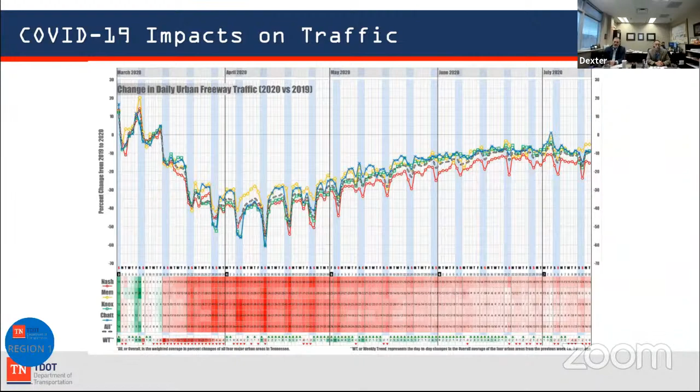This graph gives you an idea of the impact and what it was earlier this year. When you look at the circle around that drop-off, that's the March/April area where we saw everything start shutting down.

If you look across, you have to get back all the way to 2008 to get volumes somewhat similar. From 2012, 14, all the way up to 19, we had a significant climb in the number of millions of miles traveled across the U.S. So right now, we've fallen back several years when you look at the numbers.

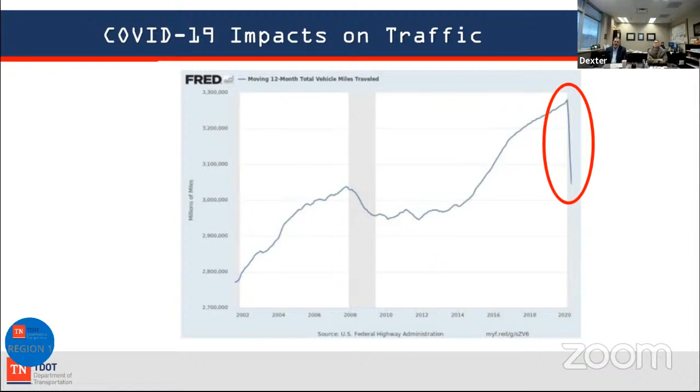What does it mean? Our fuel tax is correlated somewhat with vehicle miles traveled, so that's going to have an impact. This is an older slide, but it showed that at the end of the year, in May and June, we were down about $45 million on the state side in our collections. State revenue is funded in two places, state and federal taxes, the ones that go to Washington and then come back.

But we had been over, when you look through July through February prior to the pandemic, about 40 million. We did some administrative savings to tighten our belt, and at the end of the fiscal year we hit about where we expected to, knowing that this fiscal year we would have to see those impacts.

Looking at it as we go forward, I think when you start looking at what we're probably seeing, you're probably looking at this year about an 8% reduction in the amount of revenue on the state side moving forward.

If you looked at the worst case scenarios early on, we would be looking at about $250 million in difference. We're not going to hit that mark. We should be 100 million or less in reduction of funds on the state side, and we're doing a lot of things to try to do it.

So, an overview of what we do here at the department in the region. It's 24 counties, and East Tennessee is what we cover here in the Knoxville office. We have a lot of different disciplines under this house.

If you look at the project development side, which is Dexter's side of the house, starting out we have our own survey division. We go out and do our own survey for projects as well as oversee consultants. This is a LiDAR scan of a flooding issue we did several years ago. Those are millions of points of data that we're able to go in and use to correct the issue.

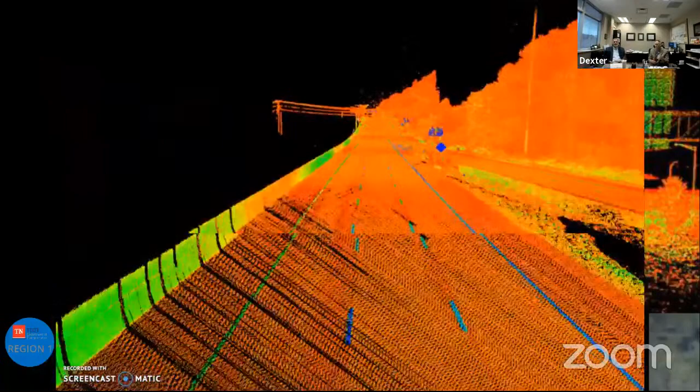At the same time, we have our own drones that are able to go in. You're getting data that's good to less than a quarter of an inch, which allows us to be pretty creative, especially with rock slides and things like that, so we can get a lot of really good data really quickly in-house.

The design section, we have a fully staffed design office that does in-house design as well as oversees projects from consultants that are doing work for us as well.

Give you an idea of something - this is pretty neat. If you go to our website, and we can send you all some links later, if you look at the Alcoa Highway Corridor, you're going to see a 3D model, and you'll eventually be able to see the whole corridor. We can share a few of the videos that haven't been edited with voiceovers yet. But this isn't a video - it's actually a 3D model of the whole project, which is pretty cool, that you can run through. You can stop anywhere.

When we did the public meeting for this particular project, we were the first state in the country to ever do a virtual public meeting. In 3D, people could walk in, they could actually look at their own property with 3D goggles on and see exactly how the project was going to look in their area or how it functioned and so forth.

So this is some of the stuff that you'll see that we do in a lot of our large major projects. It's the direction we're going. We're not there completely yet - we're doing it on some major projects, but not all of them.

We also have an environmental section. Obviously we do our own permits here and apply for them, do a lot of environmental boundary work and things like that. It's a big part and component of developing a project when you're in that early NEPA environmental phase.

Get that early design done, and then we move into right of way. We're a large real estate company in the sense that we buy and purchase a lot of right of way. We sell and lease a lot of right of way as well. There's a lot of work done anytime we're widening a project, obviously we have to go out and purchase right of way for that.

We do a lot of 3D modeling, and as we move further into the 3D world, we can do this virtually. This is a lot of underground utilities on a particular project, with several different types along with our storm drainage. The software lets us deconflict with our partners in the utility world ahead of the contract, refining the plan so we don't get a signal footing into a water line, or a storm sewer crossing into a water or sewer line. This helps mitigate expense on the back end. That gives you a rough idea of some of the things we do in project development.

The other side is operations. Looking at the total department, we have about 850 employees in Region 1. About 110 to 120 of them are in project development, and the rest are in operations, which is a pretty large portion. One thing you see a lot is the construction side of the house, our inspection and oversight of big projects. You'll also see maintenance, traffic, safety, and incident management. I'll talk about those in a bit more detail.

Looking at projects, this is an interesting slide—right now we have around $740 million under contract in East Tennessee. Maintenance is about $40 million on top of that. This slide gives you an idea, not by cost but by number of projects, since a grade, drain, and pave job is a lot more expensive than a maintenance job. But looking at the number of projects let, it shows the distribution with safety and intersections and enhancements—I'll talk about that more in the traffic section—versus bridge replacement repairs, general maintenance contracts on our roadways, and state industrial access, which is a great program. It's that last mile to a project, so to speak—not always exactly a last mile, but that's how we say it. It allows us to help when people have economic development opportunities in both urban and rural sections of the state.

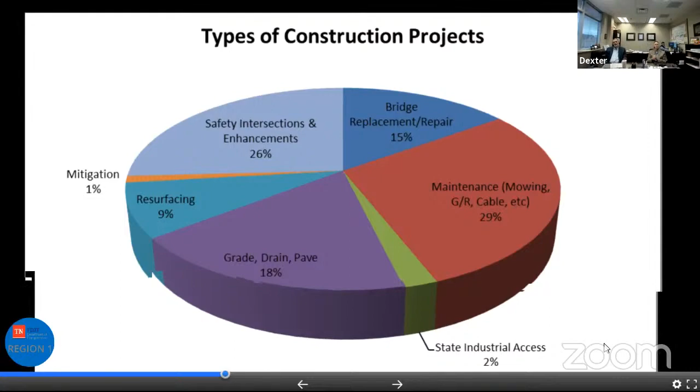Looking at some of the technology we're doing now: pavement marking and testing inventory. We go around and inventory all of our striping, making sure we've got the right reflectivity on new projects, as well as knowing when it needs to be redone. We do that with a machine that's actually part of a vehicle now.

I'm still a paper person. I love paper, I still draw on paper. I'm not good at drawing on the plan grid like Dexter does—I'm not quite there yet, but I do use it a lot. We have the ability to go out, meet with people, and actually do it in tablet form now.

Traffic signing and marking is one of the areas that's really close to home for a lot of us. Looking at communities across the region and throughout Knox County, at the end of the day we're serving the public, and this is a very integral part. We have a sign and marking office and do a lot of stuff in-house, as you can see. On top of that, we look at a lot of low cost safety operation improvements, and it's great. Being on the county commission, you appreciate when you're able to stretch your dollars, and we're the same way—if we can make a huge improvement for less money, we're all about doing that.

Sometimes they're interim improvements, and these guys are real innovative. Looking at one project we have sitting over here to the right, there's an engineering graph you'll see. This is on I-40/75, and you'll recognize it. What's really interesting is there was actually an identified Improve Act project that we're still going to do, but we're moving it further west to get a better opportunity.

That job would have cost probably around $40 million to complete. What we were able to do with our staff here in the traffic office, we analyzed this carefully and went in and did a resurfacing, re-signing. We reassigned the lanes, put a lot of markings down, and changed some things about the traffic flow. We were able to reduce the conflict points and greatly improve the functioning of that area, getting similar numbers to what the $40 million project would have achieved. And we spent $3 million.

It's looking at diverging diamonds and things like that, getting really in the operational weeds there.

The 407 project, a lot of us go to Dollywood up there. We got one coming to Knoxville, another one coming soon at a key area. That particular project we were able to do inside of the right of way, start to finish, from it being on the hood of a car at the Smokies parking lot to getting it to contract, in less than 3 years, with no right of way. The cost ended up being $11 or $12 million. The other options were around $40 million and would have taken 8 years to deliver because of the amount of right of way, and would have functioned at a lower level of service.

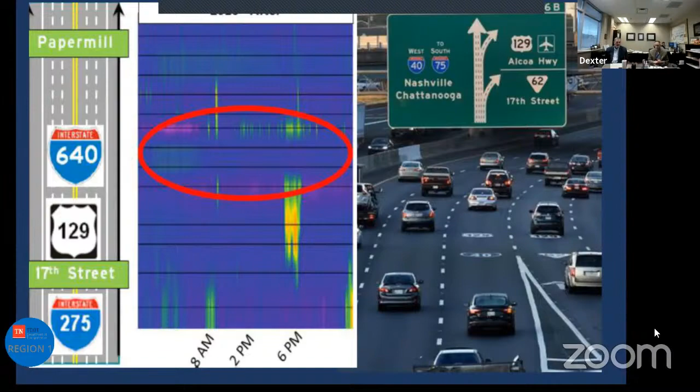Being creative is one of the things these guys do on a ton of safety projects. That's one of the things where we engage the public as well as our partners at the county or wherever we're working all across the state - people know their area better than anybody. I live in Corryton and Gibbs, so I know those roads really well. Just like all of us do in our area, we get feedback and we're able to go out and do some studies. The good thing about these guys, they don't study it and walk away - we actually keep a database and see how well our safety improvements are doing.

When you look at crash rates where we have fatalities and very high crash rates, and you make an adjustment - we did one on Alcoa Highway, and we went from a very high crash rate with fatalities in a 2.5 to 3 year period to zero accidents. When you're able to do that, you save some people's lives, and that's what it's all about.

I also work a lot with developers, providing safe and reasonable access. One of the things is protection of corridors. We spend a lot of money on corridors, sometimes with bypasses.

If we're not careful as an agency, us and our local partners, then a few years later, someone can be asking for another bypass. I think Greeneville's an example where we built a bypass and built another bypass, and now we're back at the same thing - not managing those corridors to make sure we keep them running safely and efficiently while doing smart development at the same time.

So the big thing is making sure that we're able to provide a great transportation system for Tennesseans.

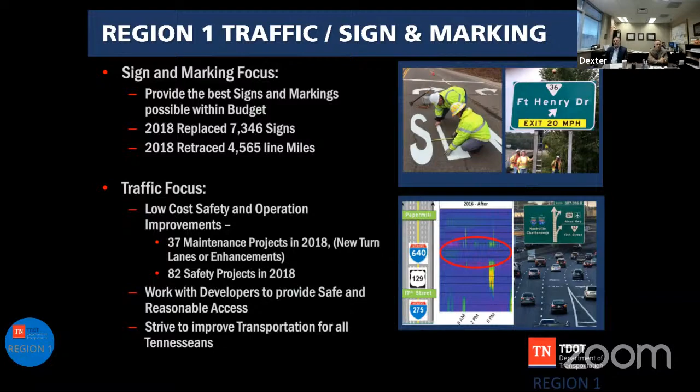Incident management - most of us know those guys, the yellow help trucks, and obviously our incident management center here at the region. You see a video wall in the picture there - we monitor all across East Tennessee. Regional incident management doesn't start or stop just in the urban areas; we actually do incident management all across the region.

We have a very aggressive incident management plan as far as getting roadways open effectively, knowing that for every minute you have a lane closure, the likelihood of a secondary crash increases exponentially. It's very important to us to be able to help law enforcement and emergency personnel - we have a great relationship now to do that.

We have rural incident management, and we're continuing to grow that. If you look at any of our 3-year plans, a lot of times you'll see some of that ITS work going on as we continue to get the bang for our buck out of our infrastructure, to make it run smoother, faster, and give information to drivers and motorists as quickly as possible.

We talk about incident response, and I'm going to show a short video here of a lot of our folks - we respond to incidents on roadways, slides, floods.

Last February, we had 72 or 76 slides in East Tennessee alone. Many of those were massive, 200-foot fills. Roadways are gone. We were talking about routes 70 and 66 up in Hawkins County. There was one fatality out of that, where someone actually drove off that road.

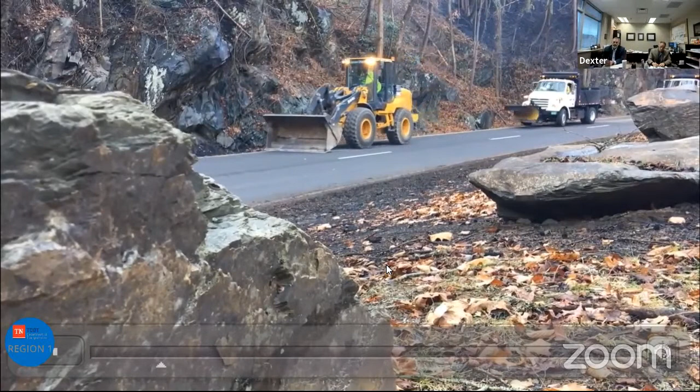They use their skills and experience to clear roadways and to assist other emergency response crews. They risk their own lives to save the lives of others. This is their story. We train for emergencies. We train for clearing roads in emergencies. We train for getting roads back open when they're closed. What you don't train for is the life or death situation, the realization that you're in a real emergency and it's ongoing. This isn't the aftermath, this isn't the cleanup. You're right in the middle of it.

Power lines, light poles are burning. You've got a tandem piece of equipment that you're driving, trying to get through under power lines and trying to get trees out of people's way so they could get out of there. It was scary, but I knew it was something that had to be done because you're dealing with people's lives up there. I was expecting the worst, and when I got there I saw some pretty bad things - buildings, cars, ambulances, police everywhere. It was chaotic.

There's fire all around us. It's hot, it's smoky. Everybody's panicking, freaking out. I'm standing there and I can't see 100 feet in front of me, probably because of the smoke. That was as scared as I've ever been, I guess, on the job at TDOT.

So the firefighters are trying to cut the tree out of the road. They get 2 or 3 chainsaws stuck in the tree because it's flexing so much from the way the wind's blowing. My contractor pulled up and said there was a tree down behind us. So at that point we were blocked in - tree down in front, tree down behind. I'm trying to start my chainsaw, and I hear a horn blow, or I saw flashing lights, and I turn around and there's the TDOT dump truck - that was Bradley in his dump truck.

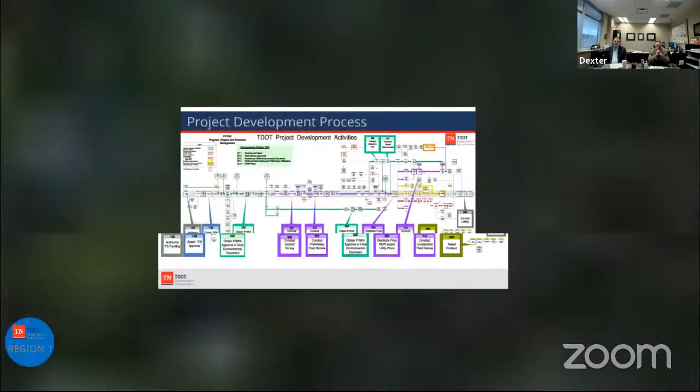When you look at that, that didn't happen by chance. That's something we prepared for years. We actually have what we call a strike force. We put it together years ago.

It was after Katrina when we wanted to go help Louisiana, and we couldn't. We wanted to go, but our equipment wasn't good enough. We didn't have the ability. You never want to go into an emergency situation and have to depend on anybody else. You have to be self-sufficient, or you're just a drain on everything that's there.

So we started developing equipment and training, and each year we trained for different incidents. Matter of fact, the year the Gatlinburg fires happened, our training scenario was a fire. We didn't know we'd have a real fire later, but that's what it was. In that instance, we were fueling all the agencies' fire trucks. There was no power, and we were the ones doing mobile fueling.

So we're able to go into areas and be completely self-sustaining. That came to fruition this year. Lake Charles, Louisiana, earlier this year, a hurricane came through and ripped through the city. It was in such bad shape that Louisiana called for aid, and we were able to answer.

We sent crews down there and they worked for over a week, and it was amazing what we were able to accomplish. The thing was, we fed ourselves, we fueled ourselves, we went in, and we were able to clear a ton of roadways and debris to get access for a lot of communities that were locked down and couldn't get in or out.

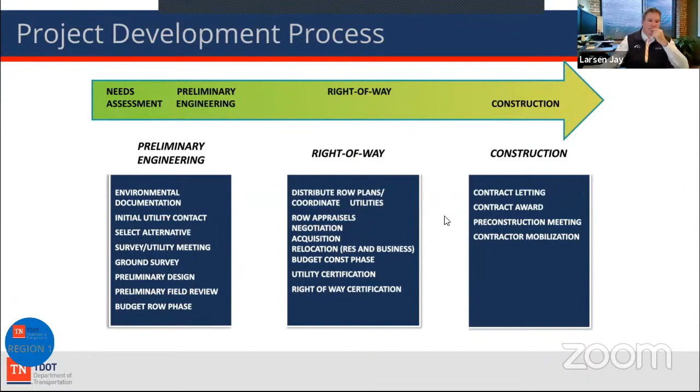Did that answer your question? Yeah, all set. Okay, good deal. So go ahead and move forward.

Now we'll get into investments that have been made. The first map we'll bring up talks about current construction projects. All of them are circled in red—we use colors to identify things. This is our red map, current construction projects.

We've got a slew of projects there, ranging from Chapman Highway with Evans to Burnett—we're moving along with that project pretty quickly. We'll get into some of the Alcoa Highway stuff later when we get into project development; I'll go through that whole corridor, but we got three of those listed there. Then you come around to I-140, a grade and drain job with Pellissippi Parkway at the westbound ramp to Dutchtown Road, an ongoing project with a completion date of early 2021.

And the next one around the map is State Route 162, also on Pellissippi Parkway, Hardin Valley Road interchange. That project's moving along at a good pace and anticipated in summer of 2021 completion.

State Route 62, that's a grade and drain project that Jones Brothers has. I think it's pretty much completed at this point. We're doing a little bit of an intersection modification, so we're still hanging on to that job along Western Avenue.

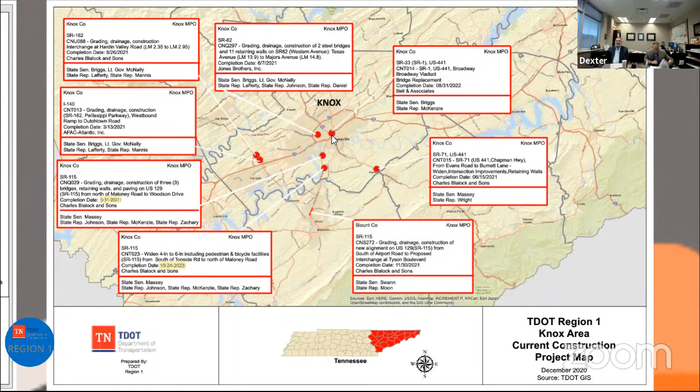So we'll get around to talking about the construction projects on Alcoa Highway a little bit further. Steve, you want to take the resurfacing information?

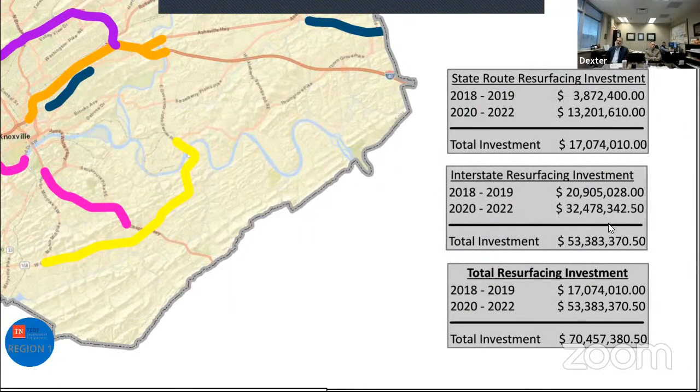This gives you a map, and this is some of the resurfacing projects around the Knox County area that you'll see here. If you look over to the right, you kind of get an idea of what we spend in a period of time. What we do under resurfacing, and we'll get into it a little bit later, we do a 3-year plan. If you look at the total investments, you get an idea of what we spend. Each year, state routes and resurfacing around $17 million over that 3-year period. The next section down, you're looking at around $53 million on interstate resurfacing. Total of about $70 million over a 3-year period as part of the infrastructure maintenance, basically, of the roadway through resurfacing in the Knox County area.

I've got it color coded here. Go back just a second, just so y'all will get this presentation. You can see the legend that kind of tells you when something was paved or when something is scheduled to be paved. As you can see there, we do have a portion of I-640 that's set to go this spring. We're having to do some railroad coordination that's going to push that eastern side off. We'll do some additional maintenance projects in the interim on that one.

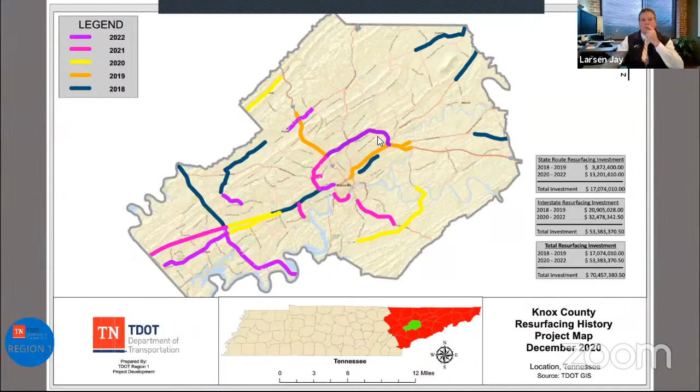Can you talk about the issue with the railroads? On 640, basically what happened was, and I think I'm right, Dexter, we built those a long time ago, and we probably have agreements somewhere, but when Federal Highway came in and audited, they said, we can't find your agreement. Essentially, is that right? Yeah, it's agreement and rights to be there.

Historically, we used to get agreements with the railroad to allow us to build a bridge inside their right of way, that kind of thing. And that's the case with 640. We've built a lot of bridges on railroad right of way. FHWA has come back over time and said, okay, if you're going to be on somebody else's property, you have to have an easement to be there. So as part of any project, we have to certify the right of way that we own it and have the right to be there. Obviously, we use federal dollars on interstate resurfacing, and to certify the right of way on this corridor, we have to prove and show where we own either right of way or an easement that allows us to be there, a permissive right to be there on that property.

So we have to deal with this on every route that we have. It's something that's come up in the past 3 years. And as I'm sure most of you know, dealing with the railroad is a very time-consuming prospect. It's not something where you just show up and say, hey, we got this issue, we'd like to get it taken care of. It's a very iterative process to get ownership of an easement from them. So we are working through that process with them, and it delays projects quite frequently. Yeah, it's something that's having an impact on us statewide. Each railroad's different as well internally on how they work through the easement or access process. So we're having to work through each of them differently as their internal regulations or requirements are there. But it's a priority for us.

When you look at the resurfacing program, sometimes we think of it as just paving, but there's a whole lot more that goes into it. It's asset management, and we do the same thing with our bridges as far as documenting, looking at total number of lane miles and what we're dealing with.

This gives you an idea of what we have in each of our regions across the state. There are four of them. Region 1 is furthest east, that's where we're at, and Chattanooga and north is Region 2. The Nashville area is Region 3, and then going to the western end of the state, Memphis, Jackson, that quadrant is Region 4. That gives you an idea of the total number of assets we have to take care of. This doesn't include bridges, which we also fund and do as part of the resurfacing project.

About what we do every year, we get about $235 million that's programmed for us to use: 66 million on interstates, 169 million on state routes.

As far as dividing out the money across the state, it generally works on the assets themselves. It's broken down percentage-wise, budget-wise by how much we have in each region. Then we do that on a smaller plane when you look inside our sub-districts within the region. Each of them has their own program to prioritize what they need to do, whether it's Johnson City, Morristown, Roane County, or Knox County.

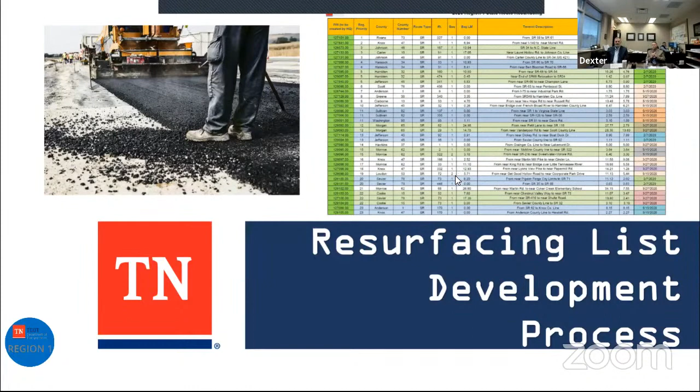That's a list, and we develop a 3-year plan, much like our 3-year multimodal plan you'll see we're actively working on right now. You'll see it's a legislative event. The resurfacing program, we do a 3-year plan as well.

We go in and do extensive work with our district management, the people in those areas. I have a resurfacing coordinator, and he has staff that works in state aid as well to assist him, looking at all of the needs and where our lane miles are as far as condition, trying to maximize our money as we move forward. It's not a situation where we do worst first. I'll talk about that in a minute, but we do a review of the pavement management data.

All these roads are ridden, and we get data from IRIs and stuff like that to tell us the condition of the pavement: cracking, rutting. We do skid testing, all that stuff. We have historical data as well, and a database of what we did, when we did it, what was done to it. Then we look at budget constraints for district personnel, and they work within their budget to develop the best resurfacing plan they can.

We're trying to get a certain number of lane miles per year, looking at the total assets we have and the money, trying to spread that and get as many lane miles as we can so that when we look at the cycle time, we're hitting our marks.

Different things we use, and this gives you an idea how long things last. The OGFC, open graded friction course, you've seen some on our interstates and other major routes. It kind of wicks the water, you'll notice you can see the lines really well, and there's no overspray from the trucks. We'll get 9 to 11 years of life out of that.

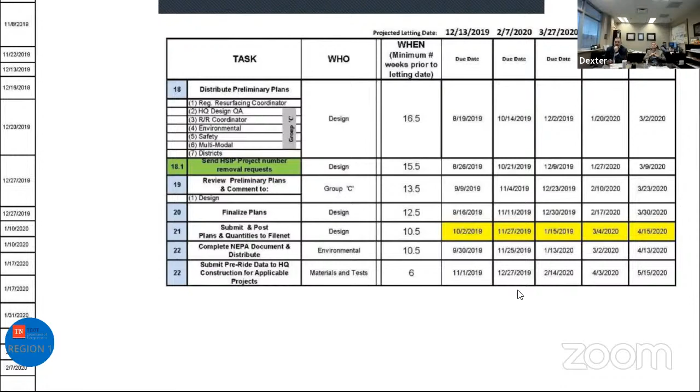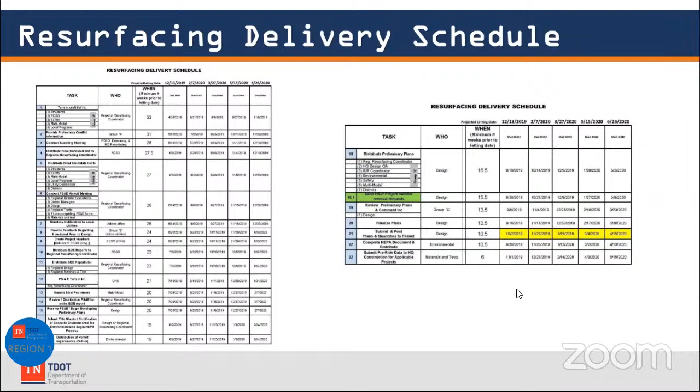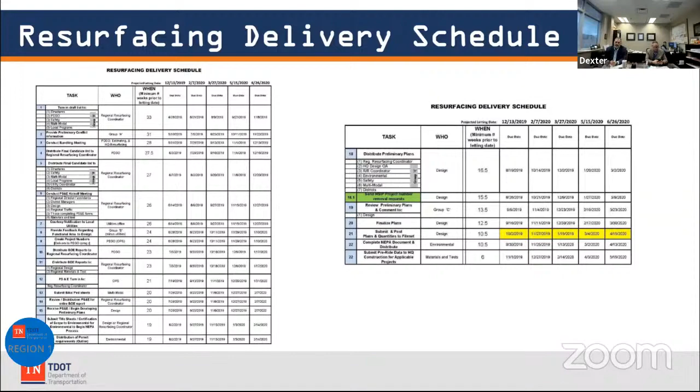From Commissioner Daly, what is the cost per mile to pave federal or state roads? You have that? I don't have that. No, I can get that in two seconds, but go to the next question. I'll look it up, I'll get it right now. That's all I have right now. I'm texting right now my pavement manager to get what that cost is. We'll go on and I'll follow up with that.

Okay, so now we'll move into projects that are currently under development in the Knoxville area and Knox County area. This map here shows most of the projects that we have under development. We'll go through these one at a time, just give you an update on where we are. But what I want you to notice is the blue boxes are projects that are in Knox County, and the other color boxes are projects of regional significance that are in your neighboring counties and probably service a lot of folks that live in Knox County.

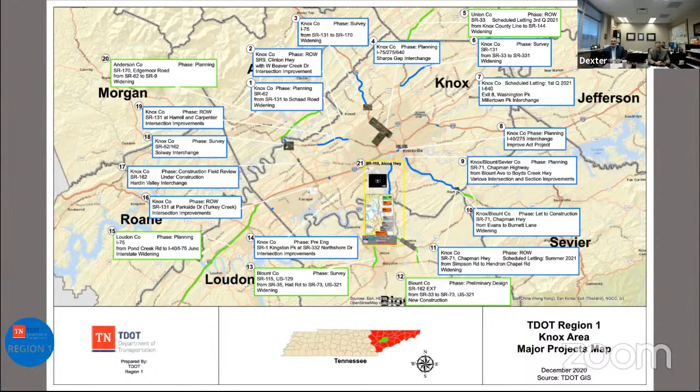So we'll start there at the top with project number one, which is Knox County State Route 62 from State Route 131 to Schaad Road. This is a widening project, I guess, on Western Avenue or Oak Ridge Highway, headed out towards Anderson County. This project is still very early in the process, and we are in the planning process. We have funded this very early in what we call location services part of it, the environmental part, and we're working through putting together a conceptual plan to address the need. We have not moved into full funding for real engineering work with the full design and survey. This is more a preliminary planning type report.

Go ahead. Our answer is about $200,000 per lane mile for the resurfacing.

Project number 2 is State Route 9, Clinton Highway, at West Beaver Creek Drive intersection. This is a project we're partnering with the county on. Jim Snowden's bunch is working on acquiring the right of way, and the county is participating in the funding. We're realigning West Beaver Creek Drive as it attaches to Clinton Highway and adding offset turn lanes to help mitigate a safety issue and improve sight distance.

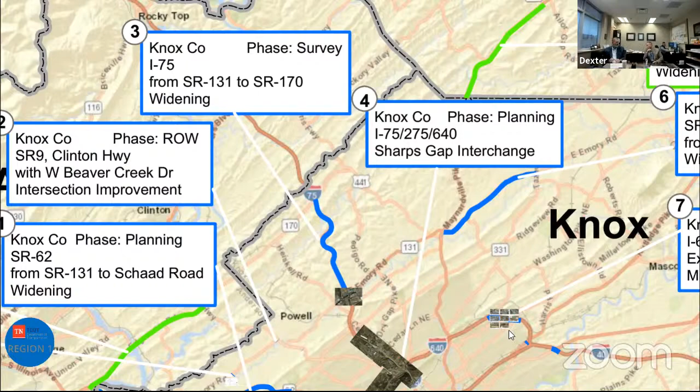Right now, on the I-75 portion that you look at, that's in blue. If you look below there, there's a little insert—that's one that Knox County and the TPO are both participating with us on. We broke this portion out. The Emory Road interchange has lots of cars and a lot of challenges.

Several years ago, we looked at a ramp queue project through Federal Highway, but the level of service didn't really improve—it just parked a lot of cars on the ramp and didn't address the efficiency of the interchange. What we're able to do here, and what we're working on right now to move into engineering and then right-of-way, is a diverging diamond, much like what you have at Bessemer Street. We have one at 407 that you've all driven through, and one right now at Boones Creek up in Upper East Tennessee on I-26.

This is what we're looking at, but the creativity to come through—this is a very creative and innovative thing that our traffic folks and planning folks came up with, along with the partnership we have with the county. The TPO has been able to push this project forward. It's a big need. We'll still be widening I-75, but that job's going to take a long time. We felt like breaking this piece out allows it to move forward and hit a spot that has had incredible growth, and this can handle that growth for years to come.

So, like Steve said, we've broken out the diverging diamond from the bigger project there, which is widening I-75 from State Route 131, or Emory Road, up to State Route 170—I guess that's Raccoon Valley. That project is getting started as well. We're early in the design phases. We do have a planning report already in hand, so we know what we're going to do, but we're heavy in survey right now, moving quickly into the design phase. We have a consultant designer on board to do that work.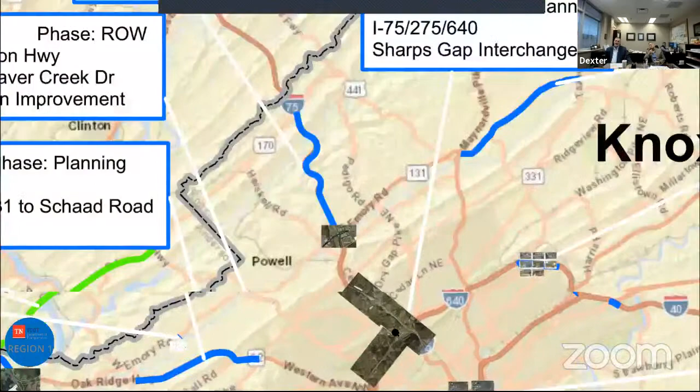The fourth project there is a big project for the region—this is regionally significant, not just a Knox County project. It's the interchange at I-75, 275, and 640. We affectionately call it the Sharps Gap interchange. Andy will probably scroll in there so we can look at the concept, but we're really early in this project as well—we're just now finishing up the preliminary planning report. There's a lot here; we could probably do a full presentation on this project alone, but we'll just scroll through quickly.

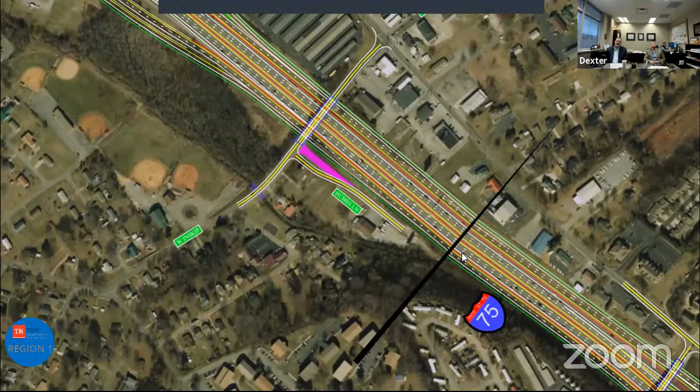The idea here is to try to separate traffic that's going on 75 or making the move onto 640 prior to the Merchants Drive interchange, so we can eliminate some of those conflict points between 640 and Merchants Drive. That traffic will be separated out, so folks will already have made their decision prior to going through the 640, 75, 275 interchange, and you'll be lined up to make this movement a lot better and smoother without having to weave traffic back and forth. Like I say, there's a lot to talk about here.

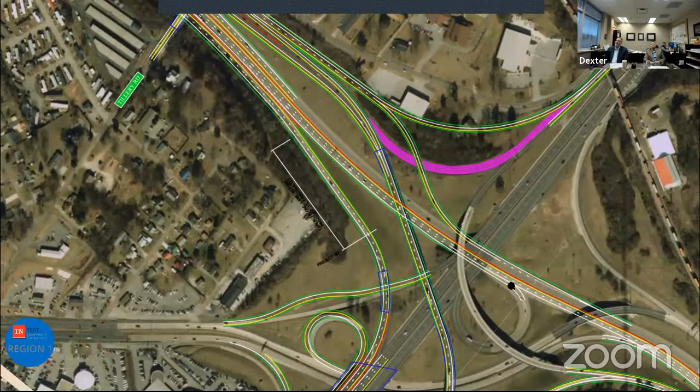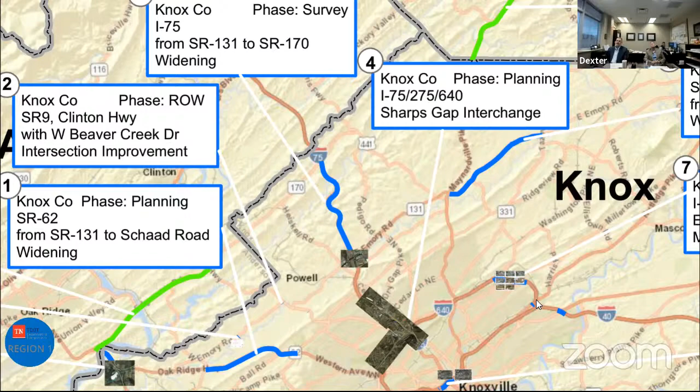That's a lot more than this meeting will handle. I just want everybody to see that we have a plan moving forward that's going to address a lot of the congestion issues here in the peak hours. Just to let you know, it's really early, but we are working on this one at a pretty good pace. The next quadrant of projects, our first green project of this conversation, is number 5.

It's the completion of a corridor, an important corridor coming into Knox County. A lot of folks from north of us travel to Knox County to work. This is a corridor completer all the way from Tazewell into Knoxville, where we've had three phases. We had one in the northern part of Knox County, this is the missing link, and we've done the one up in Maynardville already. This project is in this year's federal fiscal year. We anticipate going to construction in the third quarter, probably late summer. We are widening an existing 2-lane to a 5-lane, straightening out some curves, which will greatly improve capacity and finish an important corridor for growth in the northern part of the county and on up into Union County for connectivity.

The sixth project is Knox County State Route 131. This project is early - I guess this is the eastern edge of Emory Road, heading out towards Corryton. It starts at State Route 33 and ends at State Route 331. This is also a widening project, going from an existing 2-lane to a 5-lane, and we are really early in this one as well. We're in surveying. We have a design consultant on board, ready to start design work once the survey is complete.

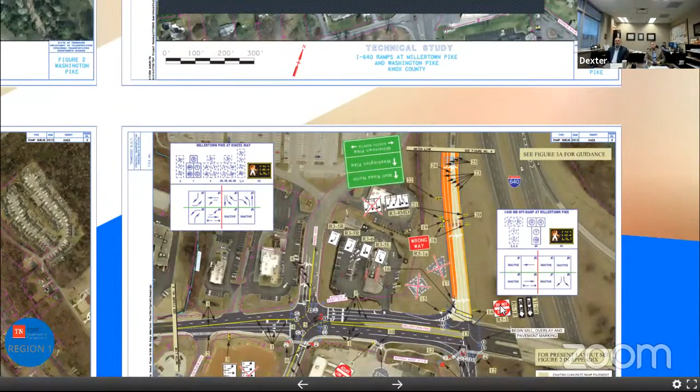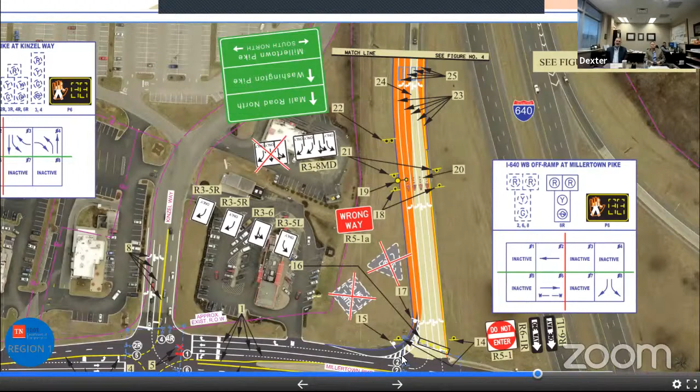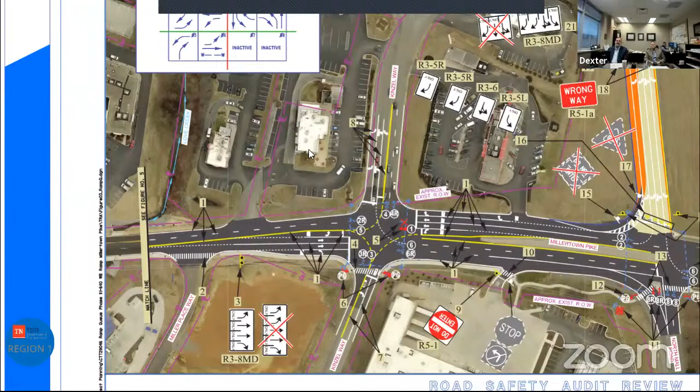This is the concept coming up from 640 westbound, approaching the mall. We're adding an additional right turn lane on this section and widening the ramp all the way back toward the interstate, so we'll have a lot more storage capacity here, improving some radiuses and adding an additional through lane through the next intersection up there - I think that's McDonald's at that intersection - and then it carries on down through to the next intersection towards Food City and all those good things.

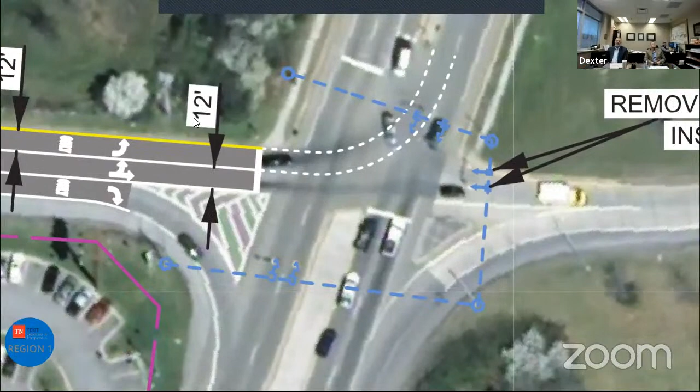On the other end, at the 640 westbound exit - yeah, right there, Andy. Here we are adding an additional left turn lane. Is that right? This is on there, that's not the right. Yeah, that's the wrong approach. Hang on.

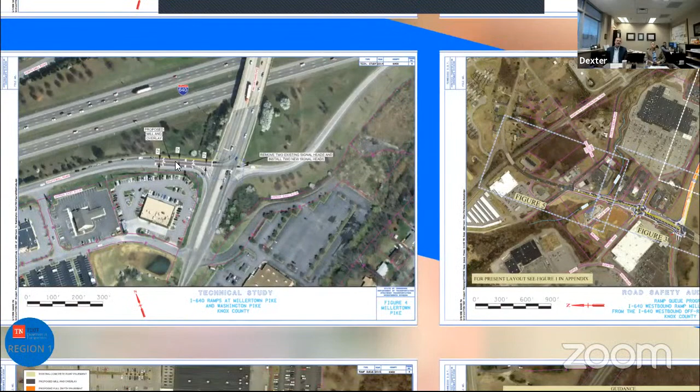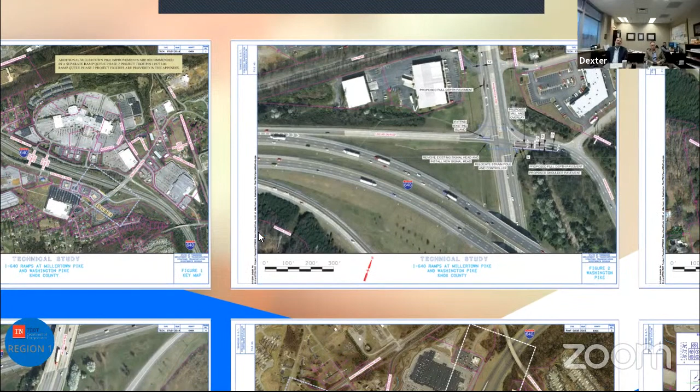We had a follow-up question to Commissioner Daly's question about paving. In reference to $200,000 per lane mile - does that mean if a road is 4 lanes wide, it's 4 times 200,000? Yes, and let me give you a breakdown on that.

So that's for something like an interstate, where I'm putting in a binder course or a structural 2-inch layer plus 1.25 inches. If you just do a regular 1.25 inches of D, you're looking at about $90,000 a lane mile. If you have to mill it, and a lot of times when you have curb and gutter that adds another $10,000, getting you to about $100,000. We do thin lifts in 2 different sizes - one is 85 pounds per square yard. For instance, a regular D of 1.25 inches is 132.5 pounds per square yard. The thin lift is less than that, about a 3/4 inch roughly lift.

That's about $70,000 per lane mile. If our road is in pretty good shape, we don't want to always do worst first - part of increasing pavement life is trying to get the right fix at the right time. So I can do a thin lift early on and extend the life of that road 14 or 15 years, versus letting it deteriorate for 2 more years and then spending $100,000 a lane mile rather than $70,000 a lane mile. So that gives you an idea, but it is per lane - so if you have a 4-lane highway and you're doing an overlay of D only, that's $100,000 per mile per lane, so it'd be $400,000 for 1 mile of 4-lane roadway.

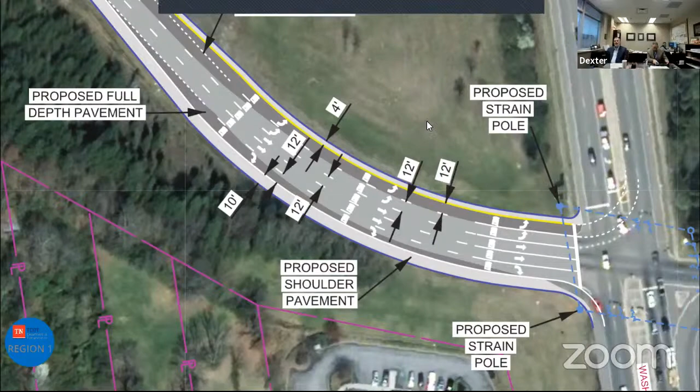You can see there in the light gray color, that's the existing pavement width. So we're adding pavement width, not really to add an additional left turn lane, I think we're adding an additional through lane maybe. Or it won't be a shared left-through, it'll be a dedicated left turn lane, additional dedicated left turn lane, and a right turn lane as well. So we're just improving that intersection there for capacity and safety as well.

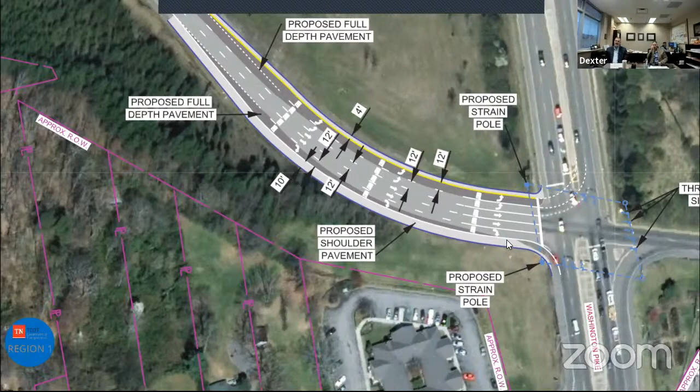And like I say, that project is set to let in our February letting, so we should have a contractor out there pretty early next year.

Project number 8 is the I-40, I-275 interchange. It's an IMPROVE Act project, one Steve talked about a little earlier, where we've done a lot of improvements with the resurfacing project. So we're expanding the limits of this project, and we're early in the planning phase to figure out what that's going to be. With those improvements we made with the resurfacing project, it moved some of the congestion and backups more toward the 640 interchange with 40 on the west end of town as you approach the paper mill exit. So we're expanding the limits of what we want to study there and what improvements we want to make. We don't have an answer yet - we've not come up with a plan to address the need, but that's what we're working towards.

Next phase of projects here, project number 9, is what we talk about as the big Chapman Highway project. This is State Route 71 from Blount Avenue all the way to Boyd's Creek Highway, about a 10-mile section of roadway. We're early in the planning phases here as well, trying to figure out how we want to address the needs there. There are a lot. This project is really looked at as a safety project, so our first priority would probably be to add that center left turn lane all the way through this corridor, and then we'll go from there to see what other needs we can address.

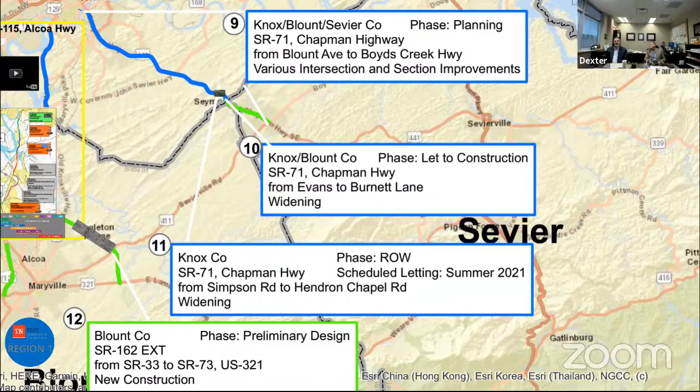As you can imagine, that is a bit of a hiccup right now with what's going on in the world today. A public design meeting is not something everybody wants to rush out to, but it's a required part of the process. So we're trying to figure out how to hold a public design meeting in the COVID era we're living in right now. That's kind of put a pause button on this project, in the sense that the next thing we have to do is check that mark that we presented our findings to the public. As soon as we figure out how to have that meeting safely, that will get this project moving again.

Project number 13 - this is probably a standalone project for the Alcoa Highway corridor. We'll get up to project number 21 on the map later, which we affectionately call the Alcoa Highway corridor, which is really from Knoxville there, Cherokee Trail, all the way down to the airport. This project, number 13, starts at the airport and continues south.

Some people refer to it as the Maryville bypass, or the highway bypass project. It's from Hall Road to State Route 73, or US 321. That's a widening project as well, going from a 4-lane highway to a 6-lane highway in that section. We're finishing up survey, in preliminary design, and will be moving to right of way hopefully sometime this year. Project 14 is State Route 1, Kingston Pike at North Shore Drive.

This project also is in preliminary engineering phases. We're using SUE techniques, subsurface utility engineering and investigation, which is kind of new to us. This intersection in the middle of a heavily used part of town has all the utilities you can imagine. So we're doing a lot of surveying work, using non-destructive testing to find where all these utilities are, so we can have a good, successful construction project. The next phase is right of way on this job, and I guess we'd probably be looking at two years worth of right of way and utility work before moving to construction.

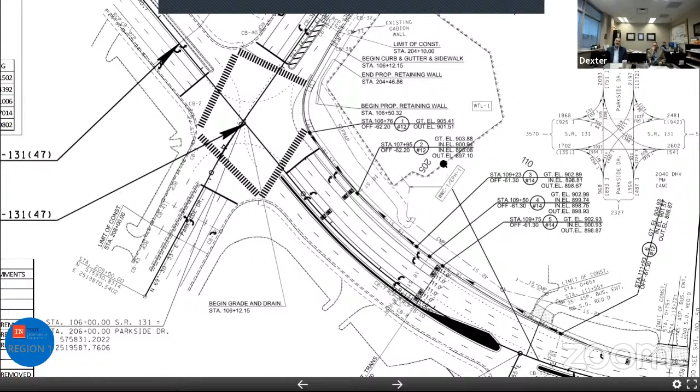Our next project is number 17, Knox County, State Route 162, Hardin Valley Interchange. As we talked about earlier, it showed up in red — it's under construction currently. Number 18 is the State Route 162 interchange, also affectionately called the Solway interchange.

What we're looking to develop here, instead of a 3-legged interchange for these two state routes, is to make it more of a traditional interchange — I hate to call it common because it's not a common design — where you have exit ramps with the opportunity to move in different directions at the bottom of the ramps coming off of 62. What we're developing here, similar to a few others around town, is a SPUI, a single point urban interchange. So instead of having two different intersections on each side of the main thoroughfare, you have one intersection in the middle under a bridge, with one set of red lights that has a couple phases, cutting down on conflict points and moving traffic a lot more efficiently.

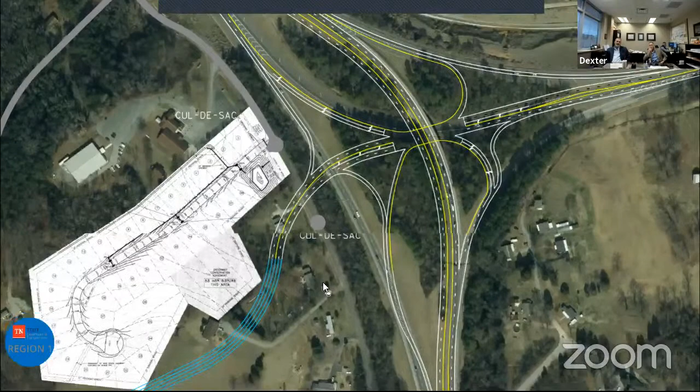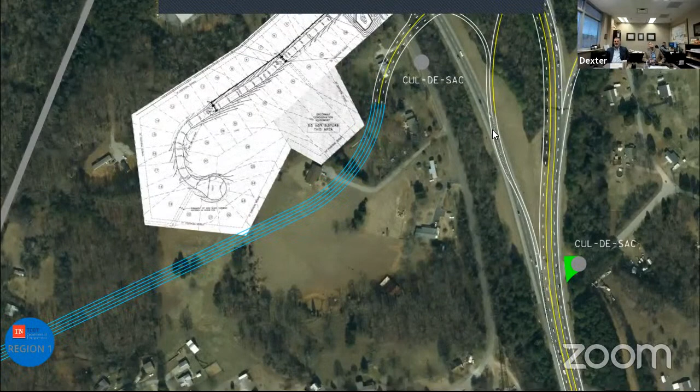This is a partnership project with Knox County. We're adding another leg — not really an extension of the state route, but it ties in as you keep moving west. It's their relocation of Solway Road to tie into the interchange and eliminate some at-grade intersections with county roads, improving efficiency and safety through this interchange. This project will hopefully move pretty quickly through the design phase, and we'll be able to move into right of way hopefully sometime in 2021.

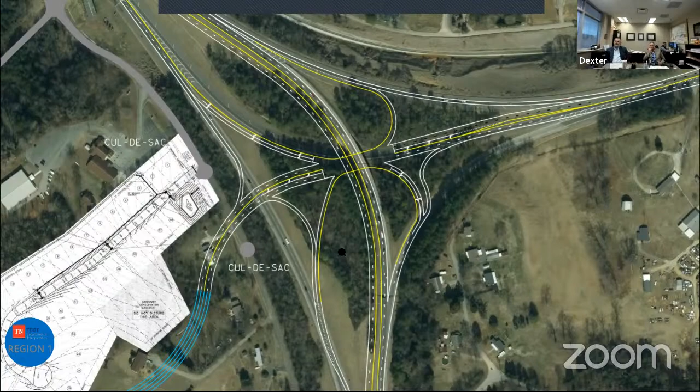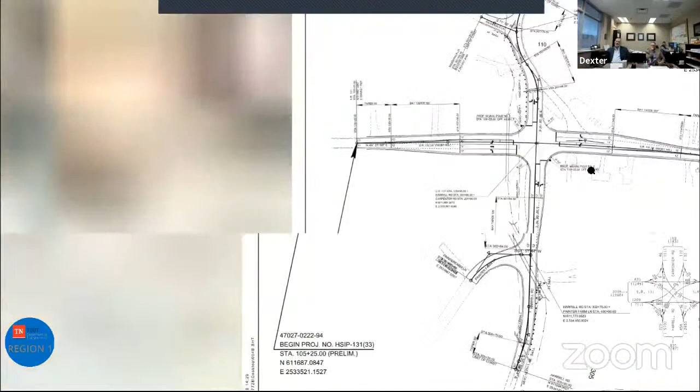Project 19 is another county partnership, an intersection of State Route 131, Emory Road, and Harrell and Carpenter. The county is providing some funding to keep this project going. We currently have two lanes on Emory Road in each direction.

We're adding dedicated left and right turn lanes on Emory Road moving onto Carpenter and Harrell. We're realigning Carpenter to the north, adding a dedicated right turn lane and a shared left-through lane. Same kind of concept on the Harrell side — we're realigning it just a little bit coming north, and we'll end up signalizing this intersection.

Project number 20 is in Anderson County, State Route 170 Edgemoor Road, from State Route 62 to State Route 9, Clinton Highway. This project has just moved out of the planning stage into the design stage. We have a consultant on board.

It will be split into two projects: one starting at State Route 62 going up to Melton Hill Drive, and then from Melton Hill Drive to State Route 9 as the second project. They'll be developed and led independently as construction projects, but they are early in the survey and design phase.

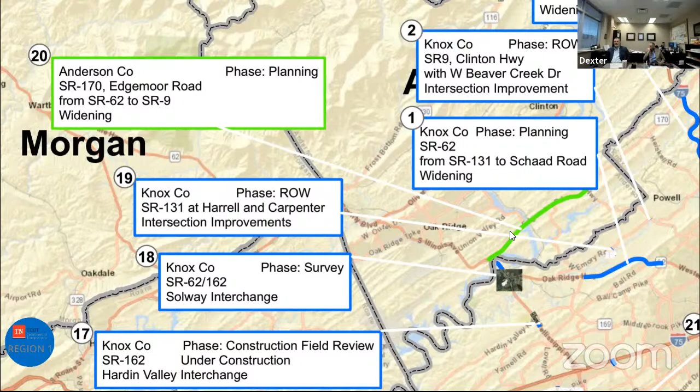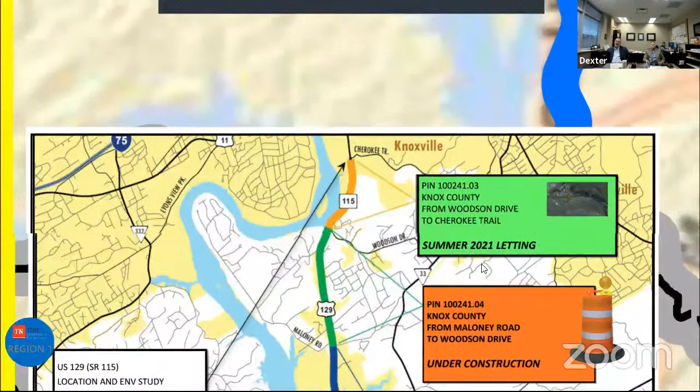Now we'll move into Project 21, which is really a conglomeration of projects. This is the Alcoa Highway Corridor. We have 7 projects along this corridor to get you from UT Medical Center all the way down to the airport. The first project, shown in green, is the last project to go to construction in Knox County. We are currently moving towards a summer 2021 letting on this project. It starts at Woodson Drive and goes all the way to Cherokee Trail.

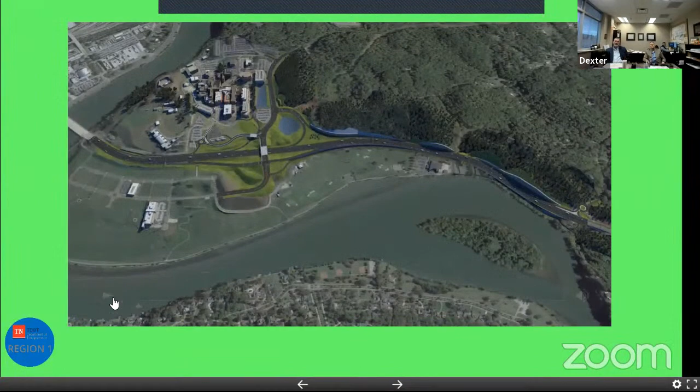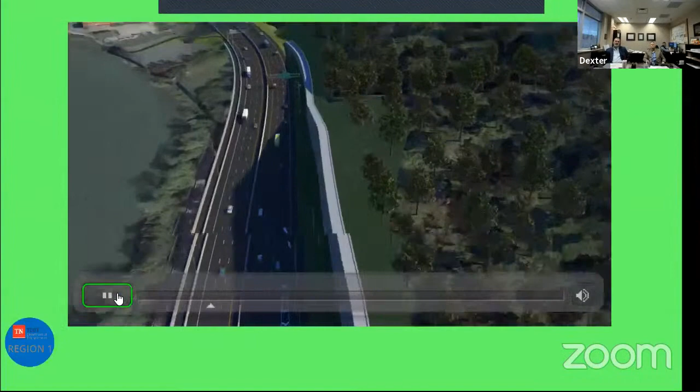We have a quick animation showing not just the interchange, but this section of highway. It's a 3D model of the design as it stands today. We are improving the Woodson access with a roundabout, widening from 4 lanes to 6 lanes, moving into the side of the hill, or mountain as some would say. You can see those huge retaining walls along the way.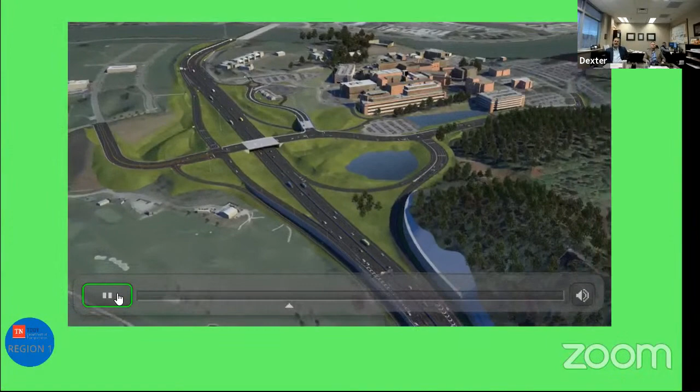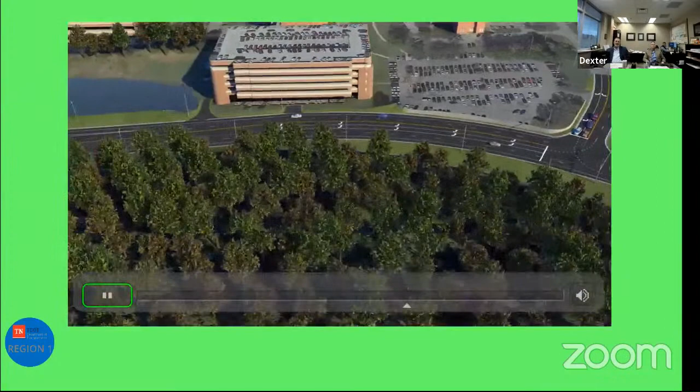This is the reconfigured interchange at Cherokee Trail, which services UT Medical Center to the north, or east. You can see where the ramps come to the back of the hospital and tie in with their parking lots. You can also see, as we come back around, what is now the new front entrance to the hospital, starting at that intersection, coming back around and tying into a series of roundabouts that will feed you right into the front door of the hospital.

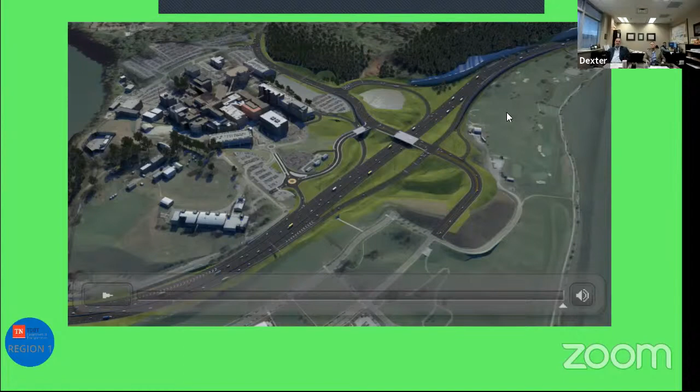It also services UT farms there across Alcoa Highway, and also UT's golf facility as well. So that's an important project that will link up some construction jobs we already have going to the south of there.

The first project that went to letting on this corridor was from Maloney Road to Woodson Drive. This project is nearing completion. I'm not sure what the completion date is, but I'd almost dare say probably the middle of 2021.

The next project down, shown in blue, we went to letting about a year ago, and we've been under construction for about a year. This is from the Blount County line up through Maloney Road, including the Johnsonville interchange. We have a quick 3D model animation for it as well.

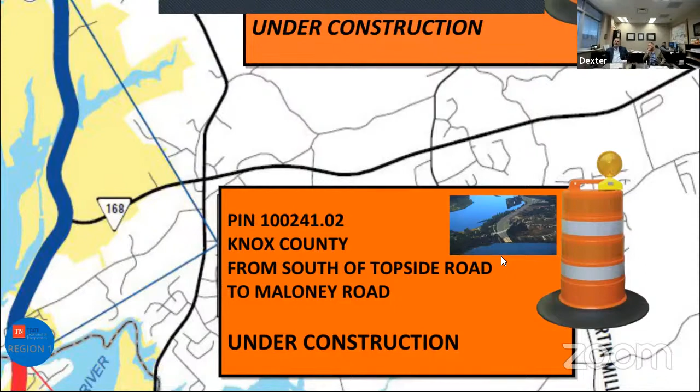This one isn't quite as far along as the other one, but it will give you an idea of what it looks like. We're creating an interchange for Topside Road just north of the county line, with an off-ramp going to Johnsonville. This is a bit of the pedestrian path, a greenway along the corridor.

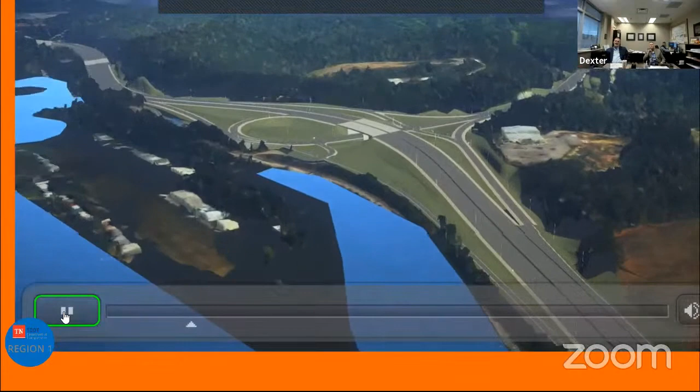You can see the interchange with Johnsonville and how it has changed—no more of that crossing over in the middle to be able to hit south onto Alcoa Highway. Again, this is not as refined a 3D model; we're still in the early phases of developing this model.

It should, if it continues to play, show you the 6-lane section that we're building through here. Yeah, it doesn't look like it's going to cooperate, Andy. Let's just move on.

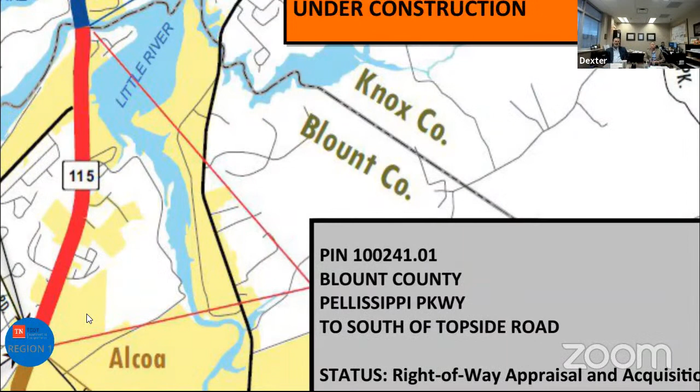So that'll finish up the Knox County sections of the Alcoa Highway development. The red section here is the middle section of all of this, and it will be the last section to go to construction. We just moved into the right-of-way appraisal and acquisition phase of this project. It's a huge lift, I dare say, in the $50 million range just to buy the property necessary to develop this section.

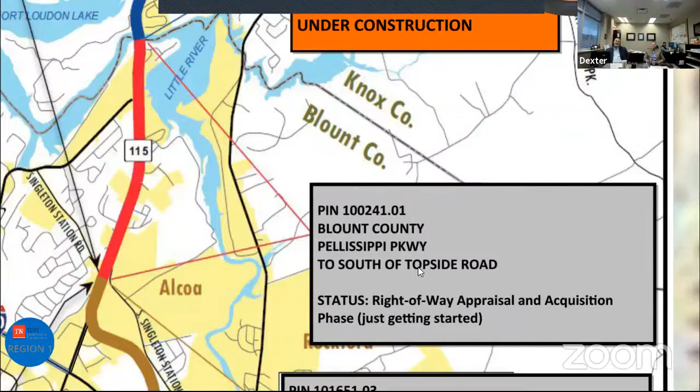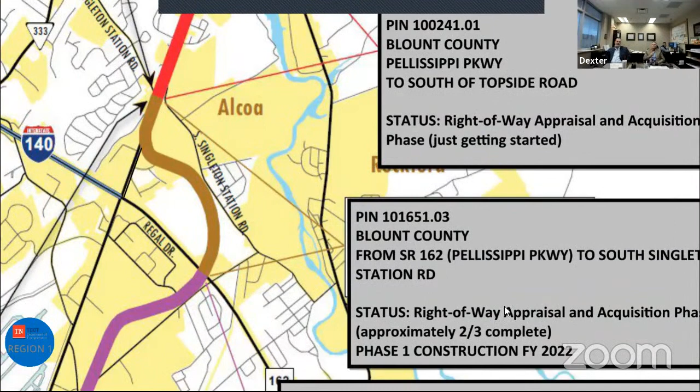Then we move on to the next two sections, which are really going to work together. The brown section, from Pellissippi Parkway and including the Pellissippi interchange, extends all the way up through Singleton Station.

And then the purple section that's below that one starts there at the airport and brings you all the way to Pellissippi. We call these two pieces together the relocated State Route 115, or relocated Alcoa Highway.

These two are moving towards construction, hopefully in FY22. We anticipate currently to let these two projects together in two different phases. We want to do a grading phase where we do a lot of the earthwork. For the purple and brown, we're going to let those two together, and we'll do a lot of earthwork and some bridge work to accommodate local traffic.

In the first phase, it's going to be nearly a $100 million project, and we'll follow up with an additional $85 to $100 million project to finish it up, which is we'll come in and pave it, do most of the bridges around the Pellissippi Parkway interchange.

The reason we need to develop these two projects together is if we turn on one without the other, it becomes a traffic issue. If for instance we do the brown one and get it done, traffic on Alcoa Highway would have to come down, navigate the Pellissippi Parkway interchange to get back up on the existing Alcoa Highway. So we made the decision to develop these two together, which leads to a two-phase construction.

The seventh project on the list is the teal colored section. It's under construction now. It builds the interchange for Hall Road and State Route 335. Along the corridor, it ties it back into the existing Alcoa Highway. So that will receive the new relocated Alcoa Highway when we get there.

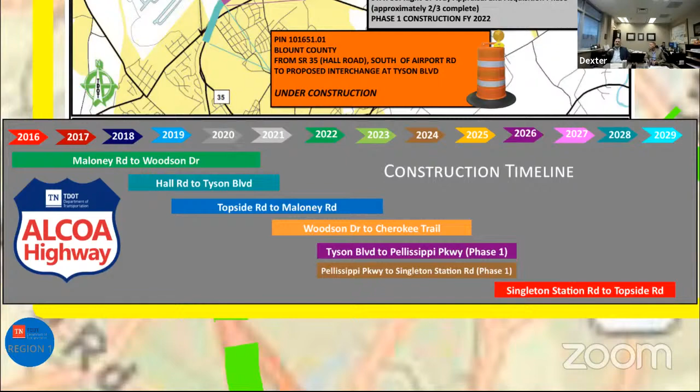And then about the same time, we'll go into the construction for the red section once we get right-of-way acquisitions finished. So that's kind of the time frame and schedule for the Alcoa Highway corridor, and most of the projects are in the Knox County or greater Knox County area. Open to any questions you may have about any of these projects.

We do have a couple questions. The first one's from Commissioner Bussler. On the Emory Road 75 North project, what's going to happen to fix the curb cuts that cause much of the problems there? And that'd be the Emory Road interchange.

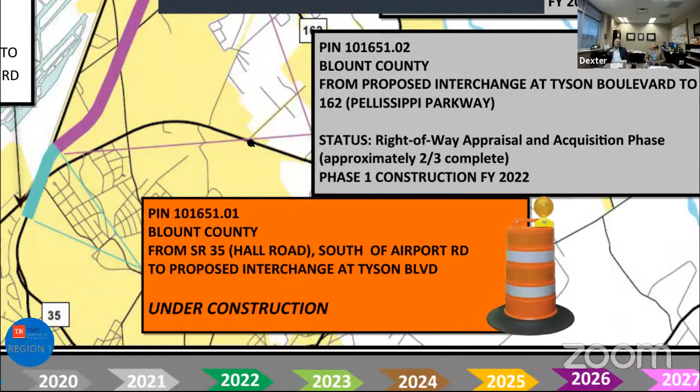Yeah, scroll back to the diverging diamond. Well, pull that up. Is this in some shape where I could show the commissioners?

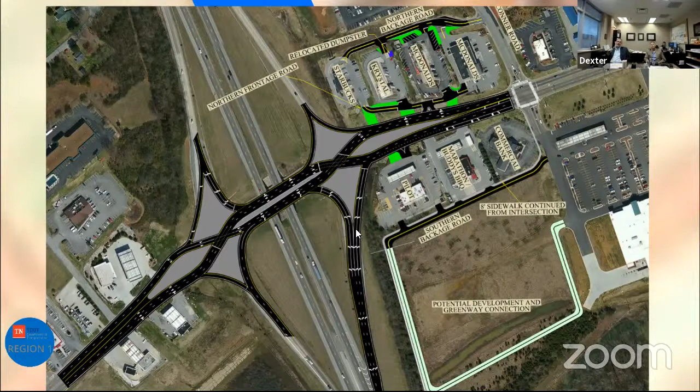We'll get this to you, but you can see some of the changes there where you're changing access at Starbucks. I think that may be what you're asking. What you see is we're building roads along the back to funnel people out to the intersection that has signalization there where the Kroger's is. So when you're coming out of Krystal and McDonald's and all those, if you want to turn left, you'll come out to the intersection there at Conner Road. If not, you're going to be funneled to a right in, right out in front of those businesses. That cleans that up.

You see the same thing at the Pilot as well, with the backage road there for the Marathon, Buddy's Barbecue, as well as the commercial bank. And that'll help facilitate some of that. There's just too much going on close to the intersection for us to do merging down there and effectively get traffic through.

What the beauty of this concept is, a lot of us drive it, me included. In the afternoons or mornings, it's just a bear to get down Emory Road at this intersection, and this will be able to flush the traffic, not only on the interstate where we're addressing the backing up of traffic on the interstate, which is a dangerous situation, but it's also going to get 131 to flush at the interchange as well, and we're going to be able to get improved capacity and throughput there without as much congestion.

So it's going to be a really, really good project.

What this really does for you as a user is, if you're coming west on Emory Road headed toward the interchange and wanted to go south on I-75 in today's configuration, you'd have to navigate all those different businesses with curb cuts coming in and out, and go through 2 signals to get on that southbound ramp. By flopping the direction in the center, you only go through 1 signal, then you have a free flow ramp going up onto the interstate. It's the same going the other way—if you're coming eastbound, you only go through 1 signal. That's how this becomes efficient, cutting down on all the conflict points you navigate through this interchange.

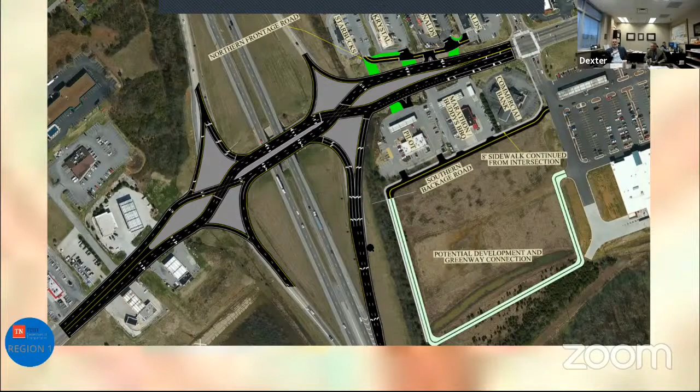Good deal, I think that wraps up what we got done, Steve. Yeah, I think that concludes the presentation itself. So like I said, if there's any questions you have, we'll be glad to do our best to answer them. Got one here.

Hi, this is John Schoonmaker. I've got a question regarding Interstate 75, 40, and Interstate 140, where they interchange—the interchange lighting program. Apparently TDOT's been working on this since July of 2016, and it's my understanding this is the only interchange where 2 interstates connect that aren't lighted. I understand Commissioner Bright got involved in October of this year, and I was wondering if you had any updates on how you're moving forward with lighting the intersection of 75 and I-140. I'm not sure if I have an update on that—I don't, but I can check and get back, and send that out when we send out our information. I'll get you an update on it. Okay, I know Martin Daniel's been working on that over the years, but it looked like it was starting to roll along, because that's a big safety issue for folks who live in Knox County.